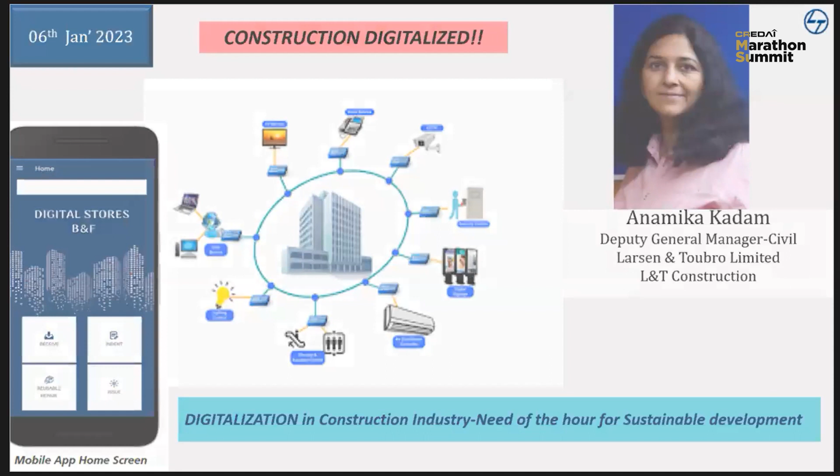When we talk about the project, a project has certain phases, right from the starting planning, monitoring, and then it comes to the engineering part, and then it comes to the construction and its management part. So all these phases of project digitalization are covered under my presentation today, where we are seeing, in each phase, how I should get the benefit of the latest technologies in whatever phase of the project I am.

If we talk about the starting phase of the project, where we tend to do planning and monitoring. In planning and monitoring, we are using certain tools like, as I am showing here, Primavera, PM tool, BIM 4D, and of course live tracking also is happening. I will be talking about my current project where I am posted now, the Delhi Airport project, where last year in February 2022, phase 1 of the project, which is T1 arrival part A, we handed over to the client, and it has been successfully operational since last year.

And I hope most of you have arrived at that terminal also whenever going to and fro from Delhi. And you must be delighted by the kind of finishes, the kind of structures we have built over there, and it is huge.

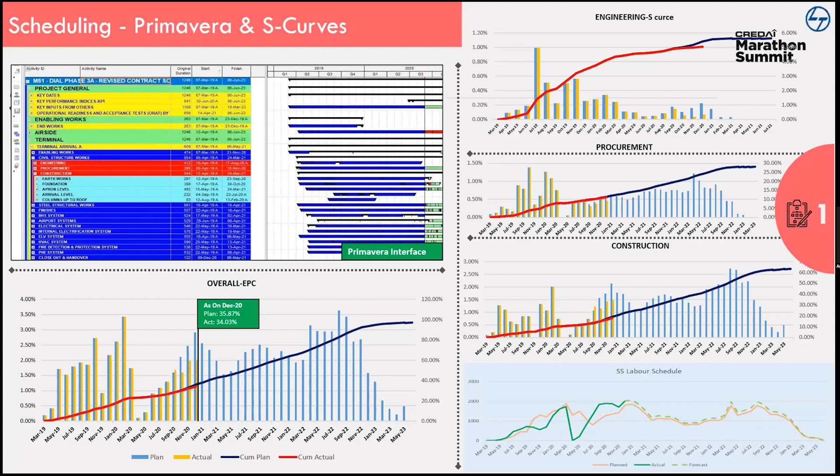So in Primavera, we are doing the scheduling part, and we are taking care of all the activities, even activities of very short duration, say 1 week or less. Those activities also we are tracking through Primavera till L5 level. This is helping us to monitor all milestones, and any activity which might be critical for the health of the project is not getting missed, because we have detailed our program in such a manner. And we are also taking care of our resources like manpower and quantities in this Primavera scheduling.

Next comes the PM tool, that is nothing but the project monitoring tool, which we are utilizing for the real-time progress tracking of the project, because it gives us live status of the project. It also gives us the variance analysis of all aspects of our EPC project. The Delhi Airport project, which I'm currently in, is an EPC project, where we have to do the engineering part, we have to procure the things, and we have to construct. So in an EPC project, in order to have control over the project on a real-time basis, these tools help us a lot, because they give us the variance analysis.

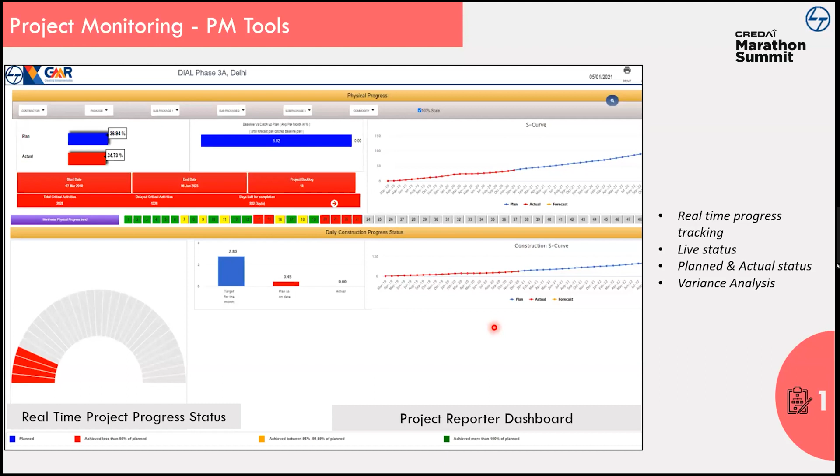We can see here that these blue and red versions of the graphs are showing how my progress is, whether I'm on track or not. So all this is happening through the PM tool.

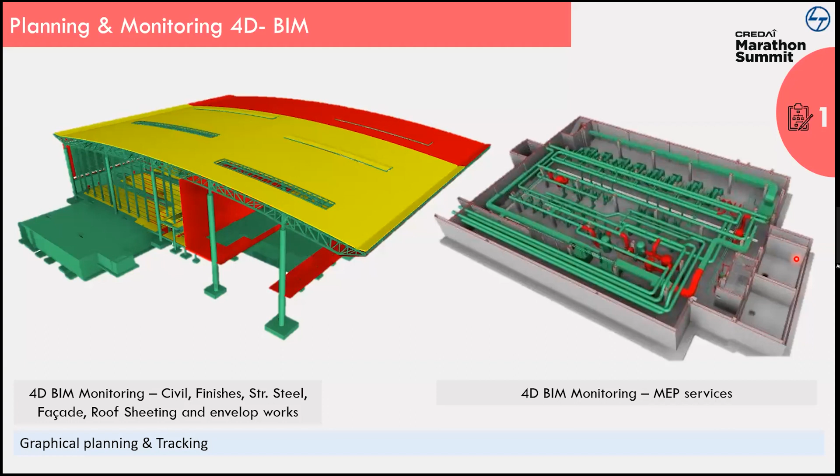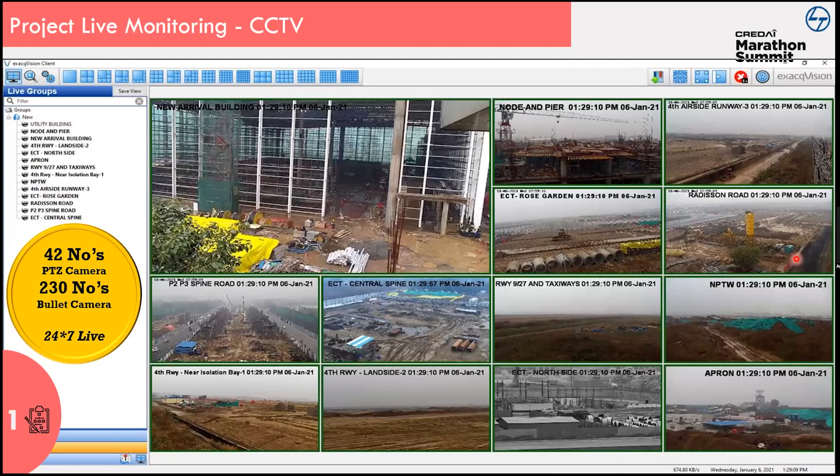Next comes the live tracking of the project. Live tracking is happening because we are creating a terminal in the vicinity of the current operational terminal. T1D, some part is already operational; T1A, some part we have already handed over to GMR, which is operational. T3 and T2 are also in the vicinity of the same terminal where we are creating a new project. So when we are in the vicinity of an already operational terminal, it is legally binding on us to secure the construction site, because airports are a symbol of national security. So considering all this, we cannot take any risk.

We have a 24/7 live CCTV monitoring room set up over here. There are different cameras, you can see 42 PTZ cameras and 230 bullet cameras. We have placed them in different locations throughout the site so that we can capture even a single non-conformity or any threat to the security.

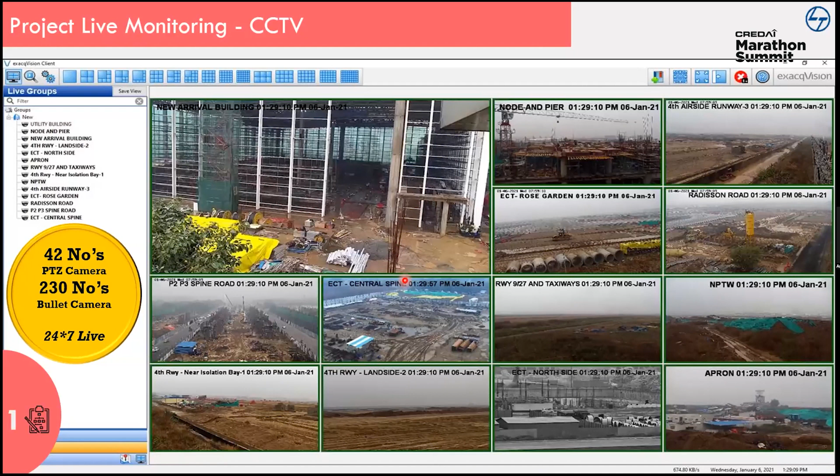We can capture and we can monitor, and we can take corrective action in time without any further delay or threat to the project as a whole. So live monitoring is happening, and this is also giving us benefit in reducing the cost over security personnel. And when technology comes into play, manual errors also get reduced considerably, because CCTV cameras are giving us live feed, and we are actually monitoring the actual situation.

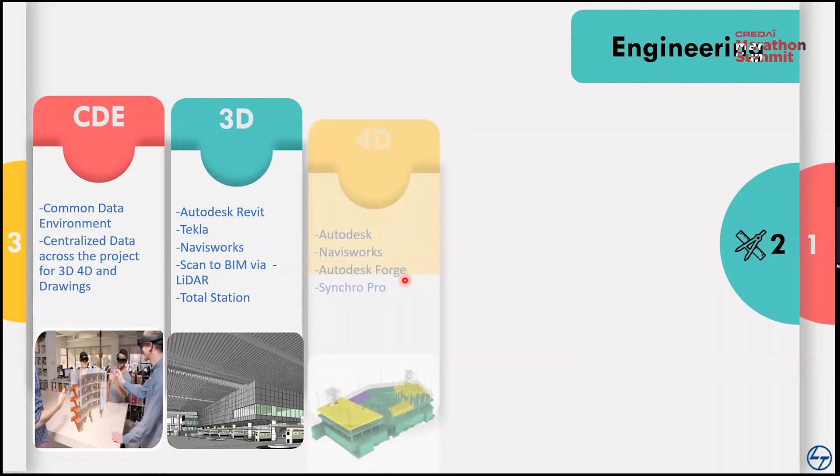Next, this was the planning and monitoring part in a very short and brief manner. Then comes the engineering part. You people already know that we are using various design softwares like STAAD, like SAP, like CAD, and all. We are utilizing different softwares in design. Apart from Excel sheets, which design engineers prepare on the basis of the codes and utilize to design certain elements, apart from analyzing, what we are doing in engineering, I'm capturing here.

In engineering, we have an exclusive design team sitting here in the project itself, and apart from that, we have some foreign consultants and specialized agencies operating from far off places and sitting abroad also. For achieving high end finishes, my finishes consultant is sitting in Singapore. So how can they design and conceptualize the drawing sitting in their places? In the Corona time, when we started this project 3 years back, it was very difficult for us to get all consultants in one place and to design in one place.

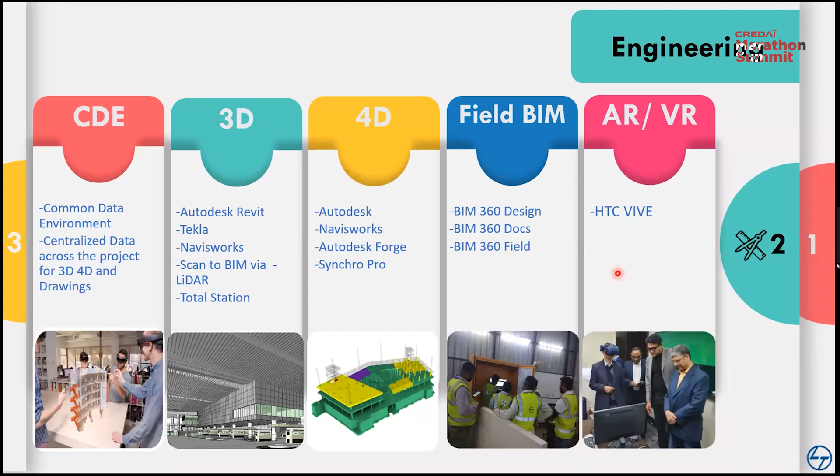Apart from that, another very useful tool we utilized in the project was scan to BIM technology. Friends, I will just give you a preface of what scan to BIM is. It is a brownfield project where we have to integrate the existing terminal building with a new terminal, integrating existing services and systems with new ones. Usually no as-built drawings of existing buildings were available, hence for seamless flow of services as one integrated system, we utilized a one of its kind LiDAR point cloud system technology.

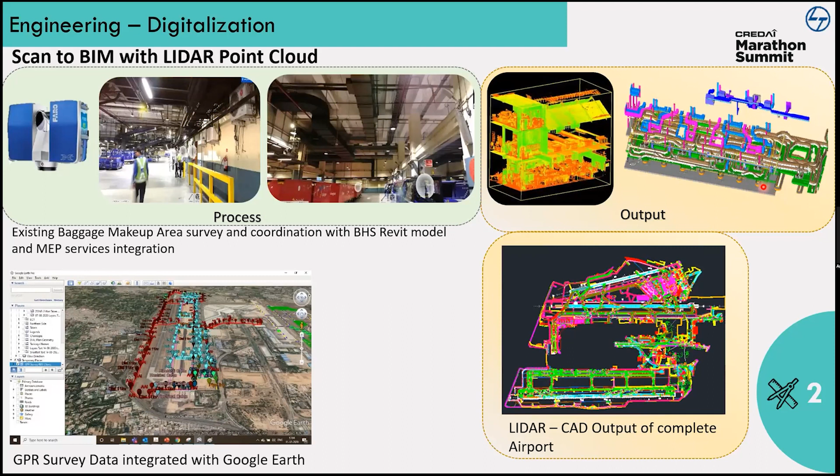This is that system. Through this, we created a virtual model of the existing terminal by scanning the existing building, which, when put through the software, gave us these CAD drawings showing the existing services running through the building. With exact CAD drawings of the existing services, finishes and aesthetics, we were able to merge the existing services with new services. So this technology we utilized.

Also, as I was telling you, we use virtual reality mode, walkthrough mode, for our client to explain to them our 2D drawings, what kind of aesthetics we are going to give them finally when the project is over. So this is called virtual reality or augmented reality mode design review process.

Friends, it is our experience that whenever we are talking about intelligent buildings like airports, approval of finishes takes maximum time. Therefore, to get faster approvals on our 2D drawings, we created virtual reality models of our drawings, and we made our client walk through virtually through these finishes and these aesthetics.

This facilitated us to get faster approval from them, and it also fetched us appreciation from them, because they were able to get the feel of the finishes they are going to get in these virtual models. When they were walking through these models, they actually appreciated it, because they now knew what in the end they are going to get from us.

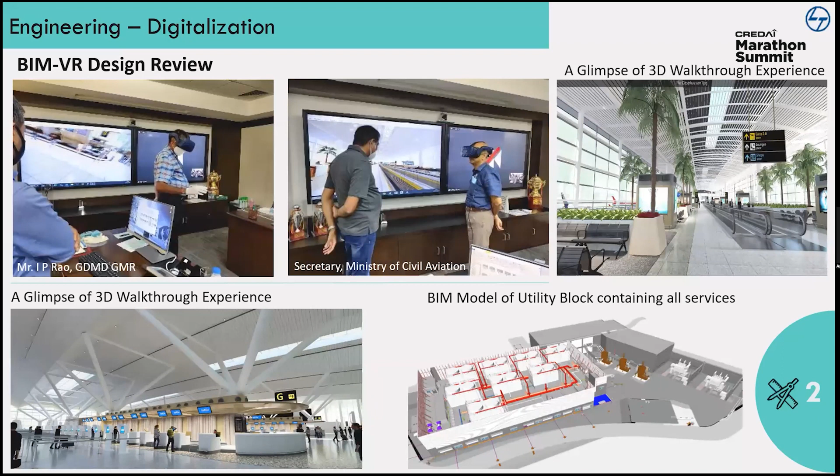First is your environmental health and safety department. Then focus comes on quality, and then plant and machinery. Then there is a store, which is called inventory tracking. Then there is survey involved. Then workman management needs to be done. Workman mobilization needs to be done. Project monitoring is also required. Then progress monitoring is also required.

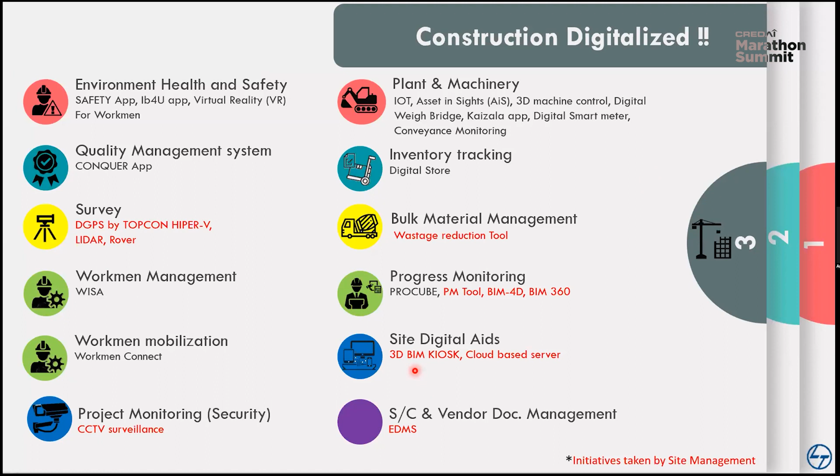Bulk material management is also required, and there are subcontractors involved in the project. Their management is also required. All these are the different aspects of any construction project. When I'm executing a project at site, I need to focus on all these aspects in order to execute within the timelines and within the specified quality parameters. So we have tried to digitalize all these aspects. How? I'll try to show you in my next slides.

Now, when we are talking about the safety aspect, safety comes first, you know. So for environmental health and safety, we developed an app called Safety App, which is our in-house app, where we are actually tracking all the safety issues whenever any activity is getting started. Every engineer at site has to use this app and initiate his activity in the app by filling a certain form which is available online to them on their mobile.

When they are filling that, they are giving the details of the activity they are going to start. Then that activity goes into the flow of their construction in-charge and the safety in-charge. Both review that activity online on their mobile, and if there are remarks and observations, they give them back to that engineer, the engineer rectifies them, and then his activity gets approved within the flow, within the mobile itself.

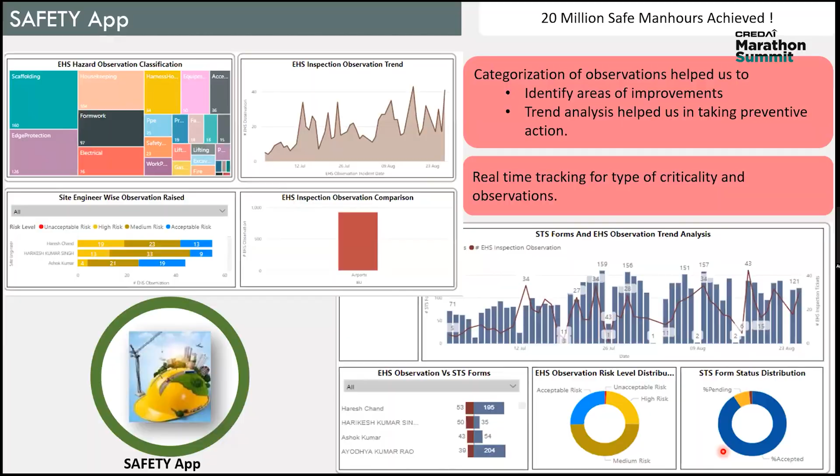We have developed this app in-house. This is called Safety App. And then if we go to the next. So now again, these are all apps, different dashboards, different practices which we have created in-house in L&T in order to monitor the project effectively, utilizing different current technologies available to us. Another important and useful app to us is Inspect before use.

What we are doing here, we have created a tag for each and every tool, from the smaller tool to the bigger tool. I'll go to the pointer option. We can see here in this picture, we have given a tag to each and every element, and these are all digital tags, and we can scan them through our scanner. When we scan these digital tags, we get important information: this particular tool was issued to site on so and so date, this particular tool came into site on this date.

Next maintenance is due on this date, and till which date it is okay and safe to use within site, and when it has to go out of the site for maintenance. So this is what it is ensuring. It is ensuring 100% third party inspections, because all the dates are digitally recorded for that particular tool within the site, whether it is a crane, a hydra, from small to bigger equipment, bigger trailers, everything; their issued dates and maintenance dates are digitally recorded into these tags.

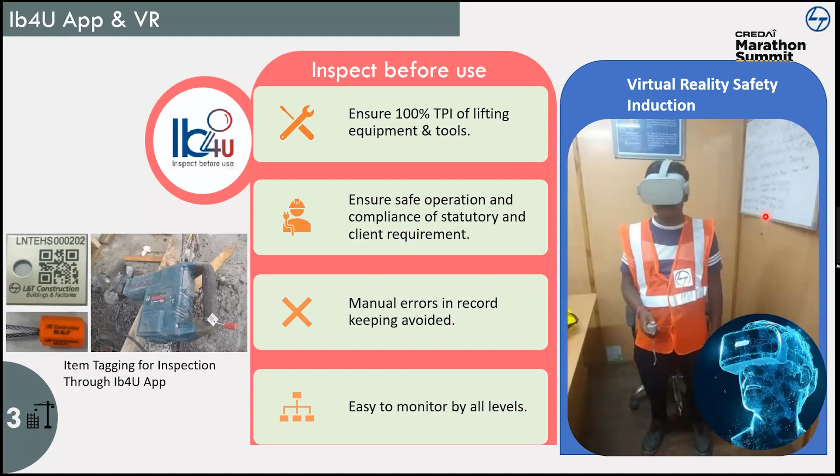Another, you can see here in the rightmost part of my screen, for the safety induction and safety training of any workman at site, apart from our client walking them virtually through the 2D and 3D models, we are making our workmen virtually walk through different safety training videos, where they get virtually inducted by wearing this goggle. They virtually walk through different aspects of their training at the construction site: how they have to perform, what process they have to follow, what PPE, what different mechanisms to incorporate, so that they can work safely at the site. So these all we are doing.

Next comes quality. After safety, quality is another very important yardstick at site, where if quality is not followed, the customer is definitely going to give us a heavy penalty, and without quality, gentlemen, nothing is successful. So it was imperative for us to produce an app or dashboards where we can actually monitor the quality aspects of the project also.

So in order to ensure that, we developed another app which is called Conquer app, and through that app we are managing our systems and recording all inspections and observations digitally. Through these dashboards, it has become easy for us to analyze all data, and this has now become an important tool because it has given us improved quality standards at site.

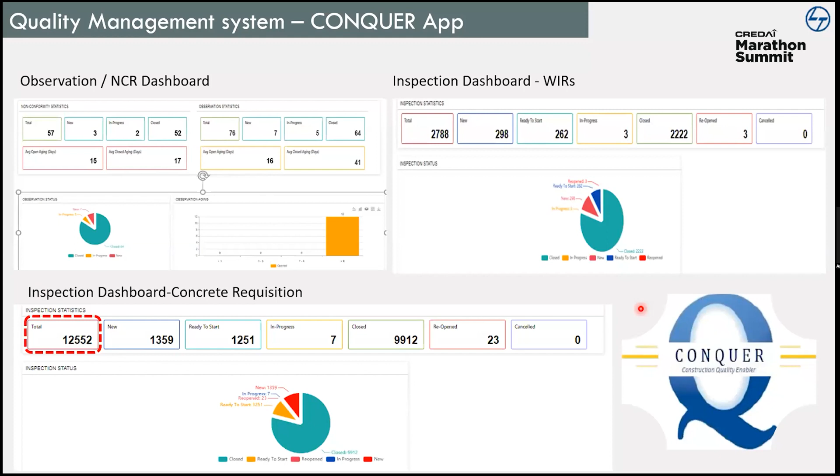Next, come to the workman induction part. Being a large project, around 15,000 to 20,000 workers are working in a single day at the site. With such a huge flow of workmen, how are we managing and inducting them so that they can come easily into the site without wasting time, and we can utilize them as per their skill? What kind of mechanism can we employ?

So the mechanism we came up with is WISA. WISA is the short form of workforce induction and skill application. This is also an in-house dashboard which we developed for workman induction. Each workman in the project is tracked through this app, and it is giving us multiple benefits because this is the digital enrollment of the worker.

Any worker coming to L&T at any particular site, I need not go for duplication of enrollment if he is going to a second site, because all data for that workman is already available in the L&T systems, and his experience and skill report is also available. Before inducting him into the second site, by going through his data, I can know whether he is semi-skilled, fully skilled or non-skilled, whether he can do red hot works, or only ground works or certain small works.

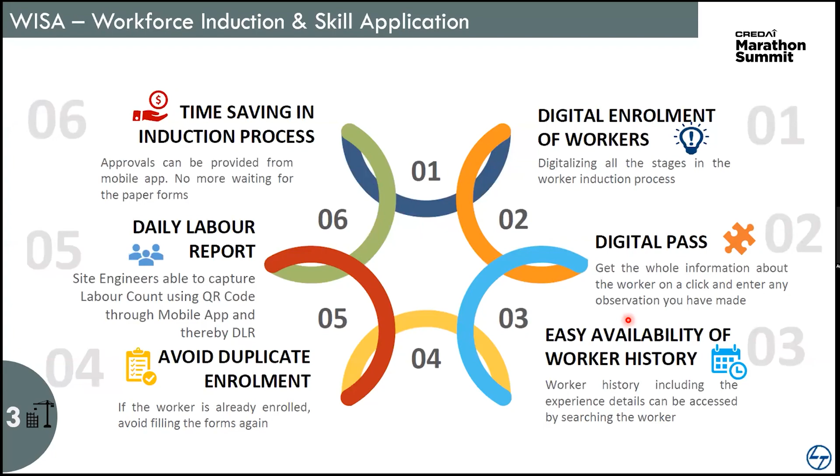Next, come to the survey part. In survey also, we are utilizing all high-end survey techniques to get the right information from the ground, so that we can design our system in the best manner, because it is currently executed in the vicinity of the already operational airport. So services are already there for the current operational airport.

When I am executing, my survey should be 100% correct, because when I am executing earthwork, if I hamper any services like PHE, electrical, HVAC, any service which is part of the current operational terminal, and I hit that service during execution, the entire operational terminal will go for a toss.

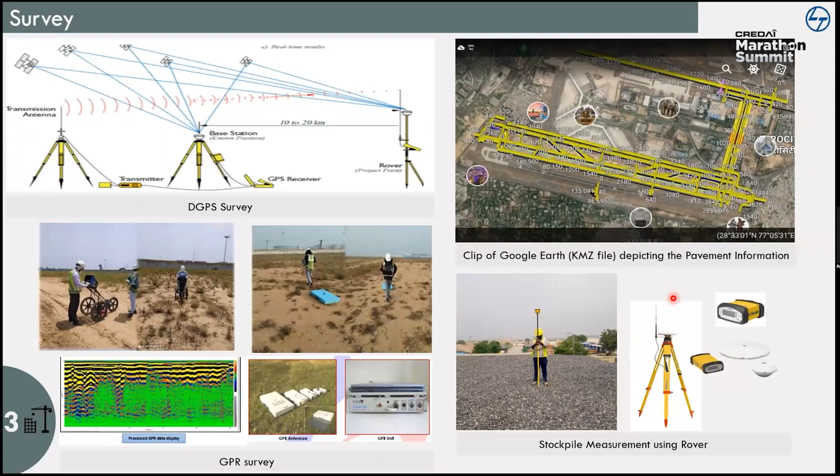So I cannot do that. So in order to ensure my 100% survey and whatever execution I'm doing for the new airport, it should be hassle free, clash free from the already laid services. For that, we utilized all high-end survey equipment here in the project to do the survey.

We are a little short of time. Please take this as the last 5 minutes for the presentation. Yes. Thank you very much for reminding me, and I'll do so.

Next comes the very important and useful tool which we have developed in-house: the plant and machinery dashboards. Every asset inside is actually connected digitally, and we are maintaining their operational data. And we are getting useful insights that this particular mast climbing platform, if we see the dashboard data, the working data of a certain month, it was actually non-utilized.

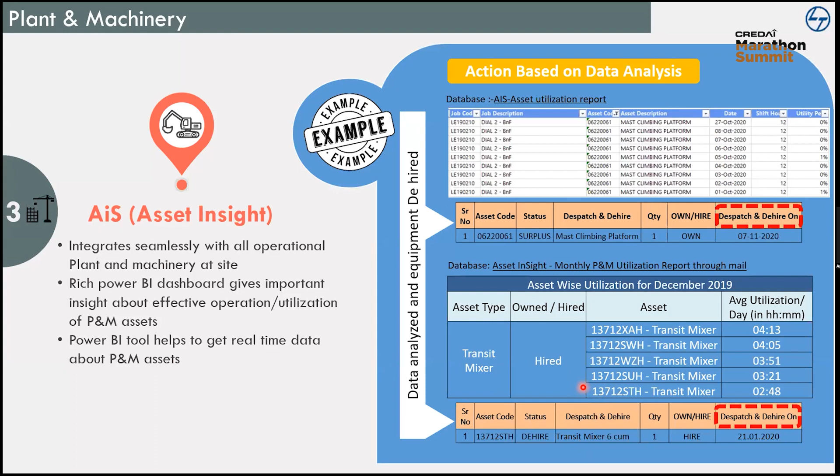It was hired equipment, so we dispatched it immediately after reviewing this report. Another one, a transit mixer, which was also hired, was not effectively utilized in the system when we saw its utilization report, and this transit mixer we also returned. Same way, batching plants are also digitally monitored, and for every concrete dispatch from the batching plant, we can see the productivity.

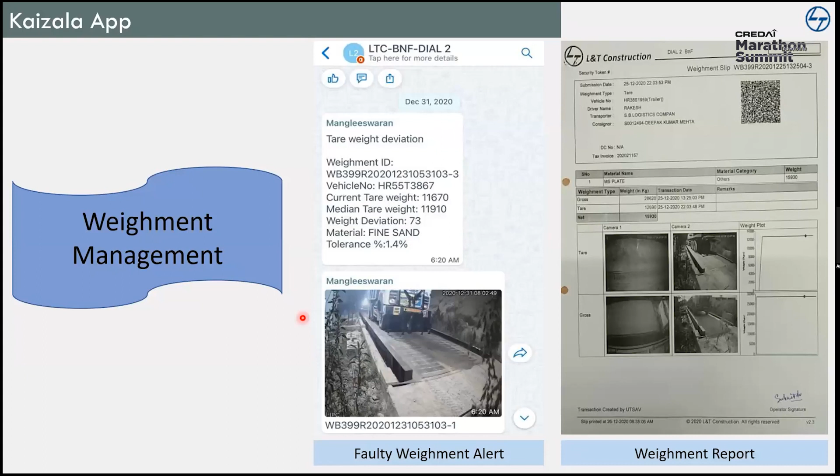And then for weighment management, we have developed the Kaizala App, and we are monitoring all weighments at the site digitally. And then comes the store. The store is also now at a single click of the mobile. Engineers can put the requisition of the material through their mobile, standing at the site itself, and the store can digitally see that a particular site engineer has a requisition and can approve it, and it goes seamlessly without wasting time. The material request is approved, and material goes to the particular site engineer at a particular location.

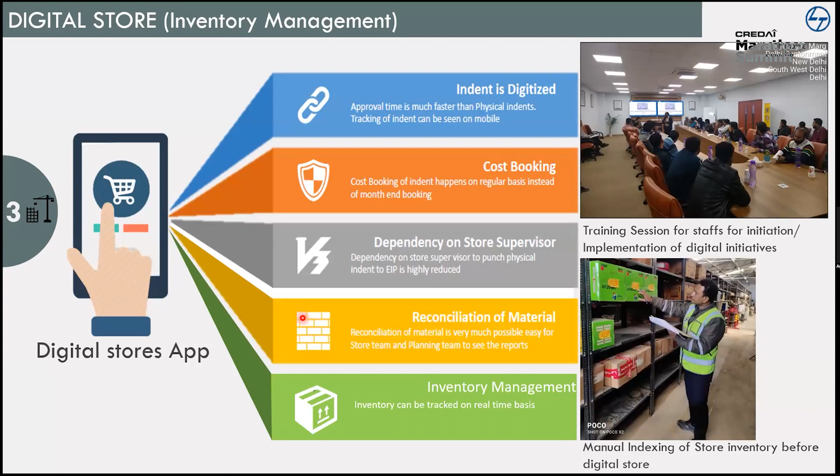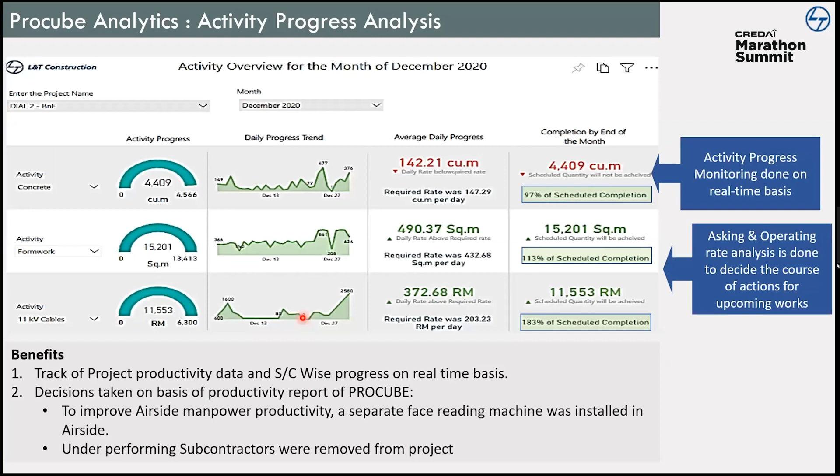So this is called the digital store application. And then this is ProCube. ProCube is what we are utilizing for project monitoring. This is also a mobile app. Every site engineer is digitally recording their daily progress in this ProCube app, and we are getting beautiful insights after that and taking corresponding actions.

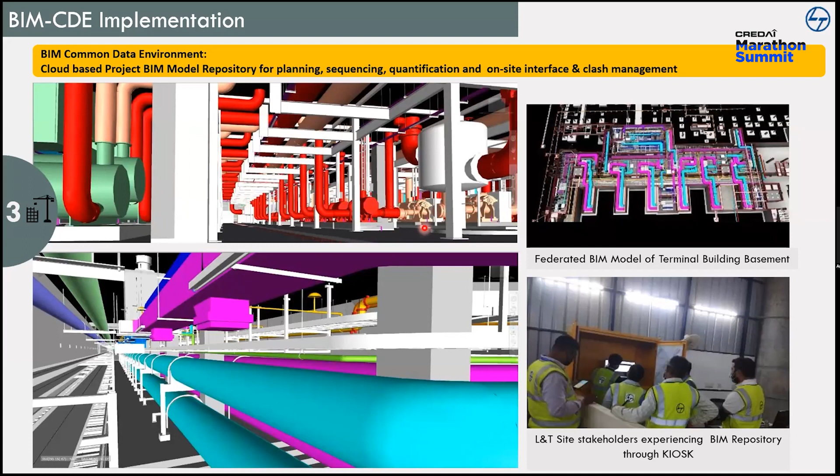This is the common data environment application at site, where we have maintained site kiosks, and the engineer standing at site can see all the 4D and 3D models on the computer, and can actually see how services are flowing in their area, and it is easy for them now to execute. Now, very quickly, I'll go to this 4D BIM progress tracking, how we are doing progress tracking through 4D BIM.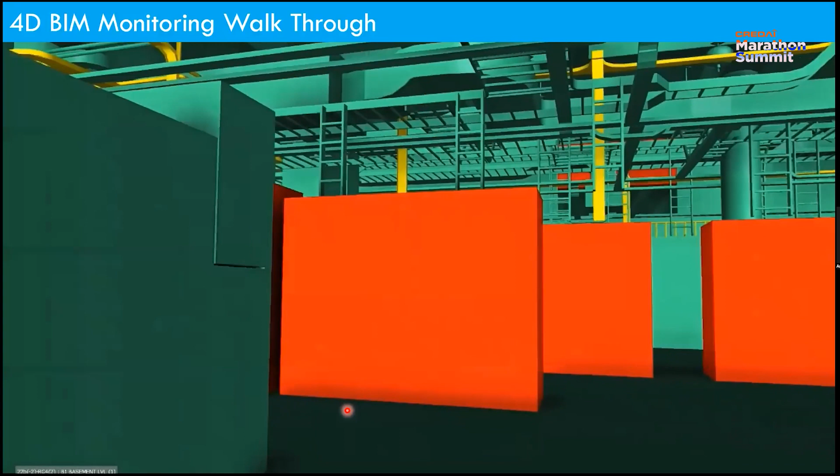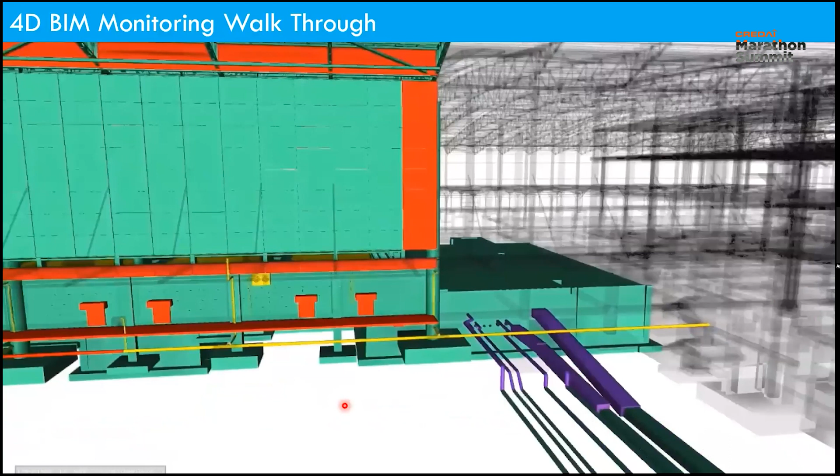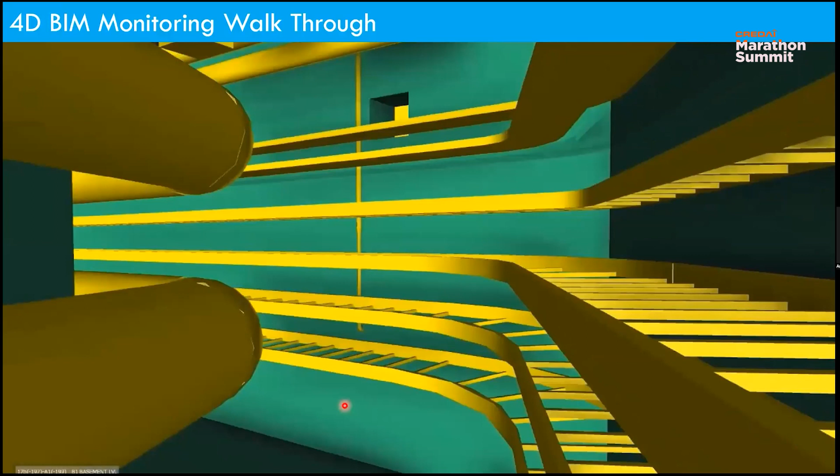These kinds of videos we use in tracking the progress of the project. This is the pier part of the airport, where footings are under construction. Node building. Node basement, where all services are there. This is the tunnel connecting the utility building to the terminal, different zones of the project.

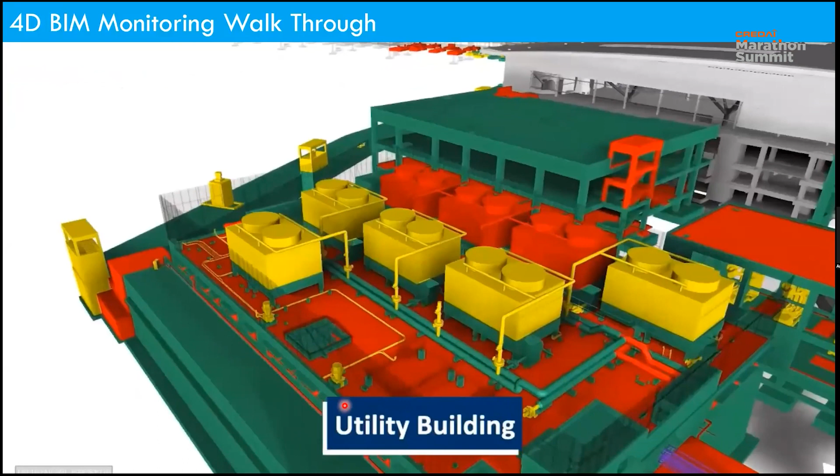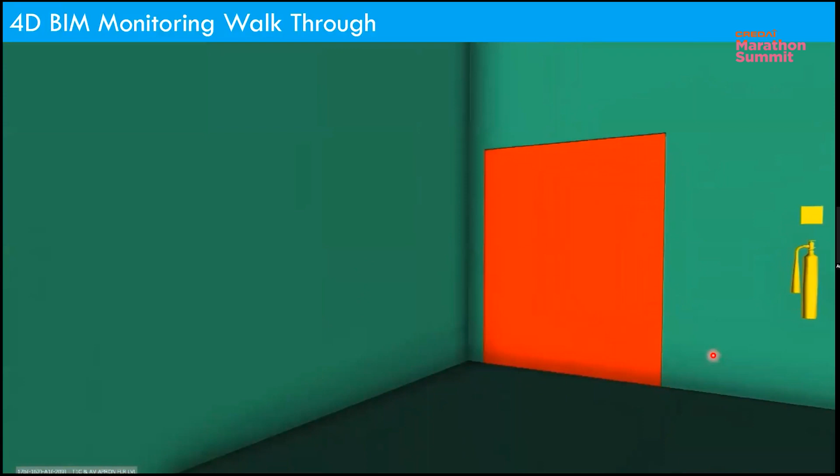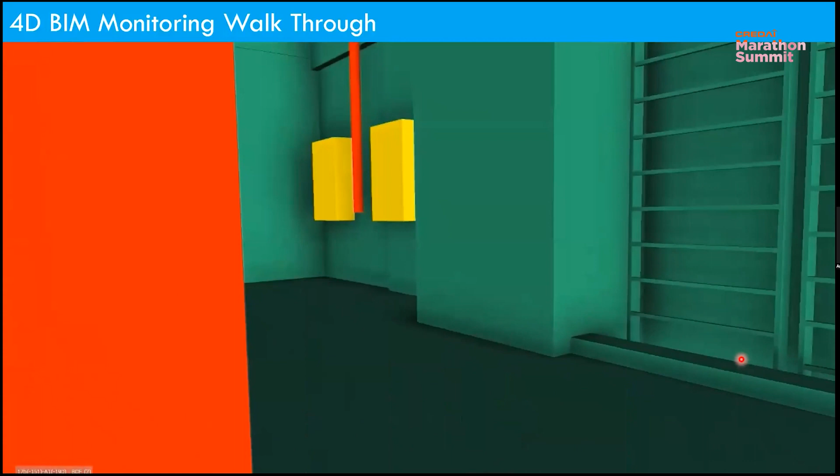Cooling towers are under progress. These are cooling towers. This is the basement of the utility building. Most of the services are installed over here. Some are delayed.

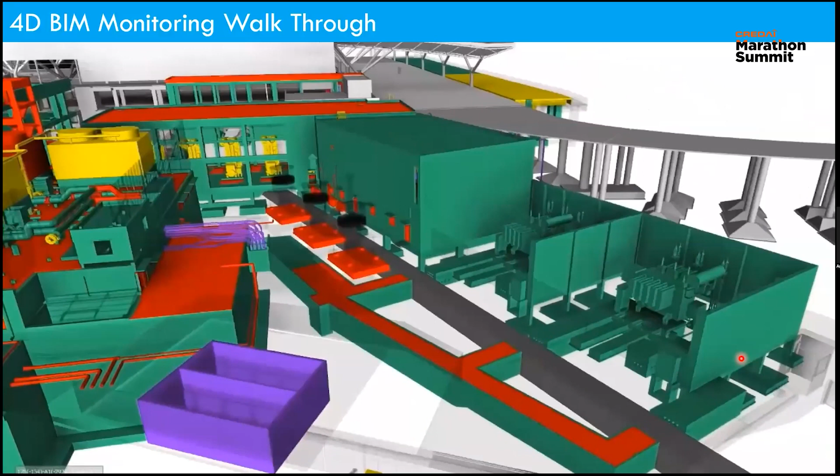So I have come to the end of my session. Thank you very much. I hope I was able to give some insights through this session to all of you.

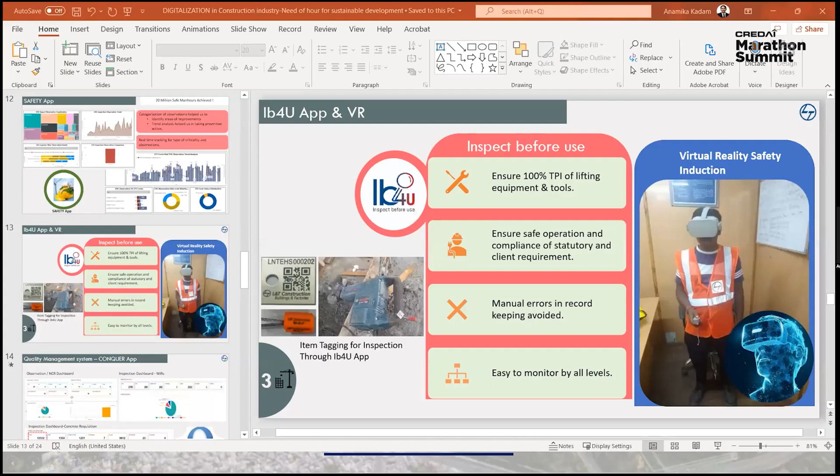Thank you very much, Ms. Kadam, for the informative session that you shared with all of us. We all are aware that our Honorable Prime Minister Shri Narendra Modi ji is focusing on the role of digitalization in every facet of industry, and real estate is not an exception to it. So your session is really useful for us. It would be great if you could arrange some site visits for our members for more learning about digitalization at construction sites.